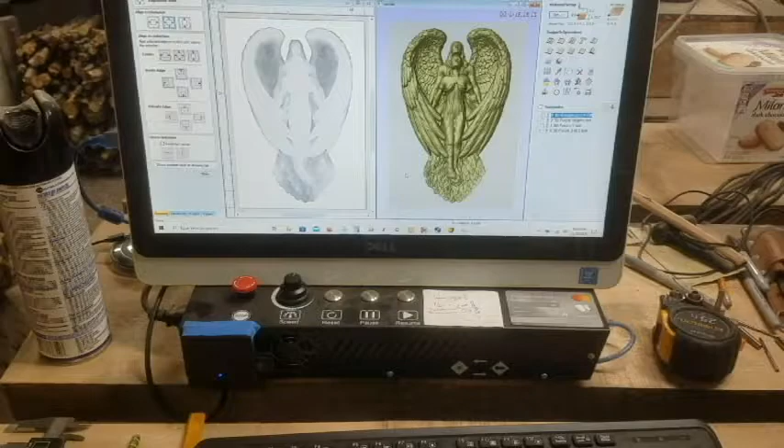Okay, so this is the project that we're going to be making. This is actually going to be a Christmas gift for Mrs. Devil.

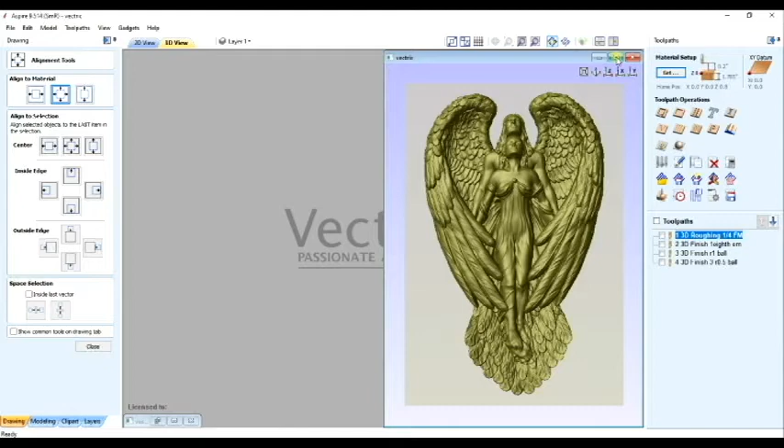Let's take a look. And that's me, the fallen angel, and that's Mrs. Devil.

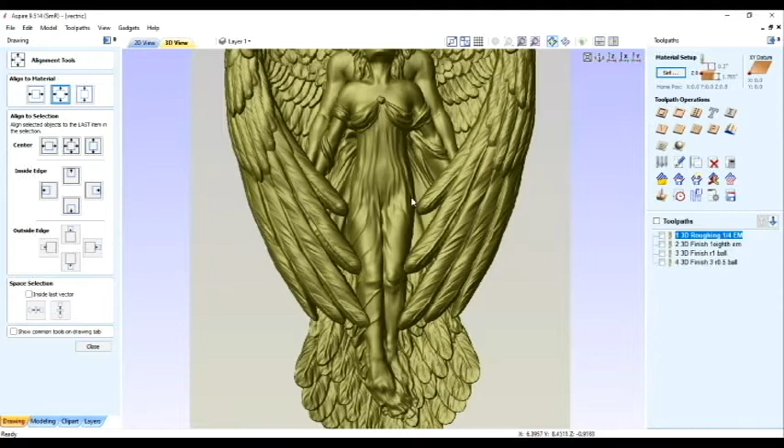I wanted to do it out of beech, but that didn't work out. So we're doing it out of just that walnut slab, which is drying. The glue's drying as I speak. So that's what we're working on.

Oops, wrong button. Here's the file. I found the file on the internet.

The size of the drawing right now is set at 11 inches wide and 16 inches high, with a depth of 1.785, which is what the 2 walnut boards glued up should come out to be. We'll measure that when the glue dries.

So that being said, if you look down here, you'll see coordinates, and you'll see the Z coordinate on the right down here. It's inches, 17 to the top, 550 thousandths to the top here, 0.17 from the top. I think her chin is probably the highest.

Nope. The nose, maybe? Well, I guess her chin is. These are up there too. 0.1, 0.2. So here's your highest point.

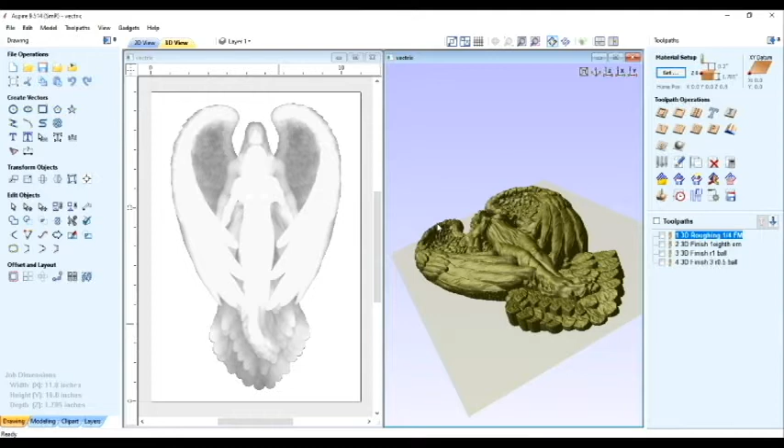And then we got the wings. Actually, yeah, the wings are slightly below. Yep, look at those mountains. We got a high point here. What's this too? Is this the wing?

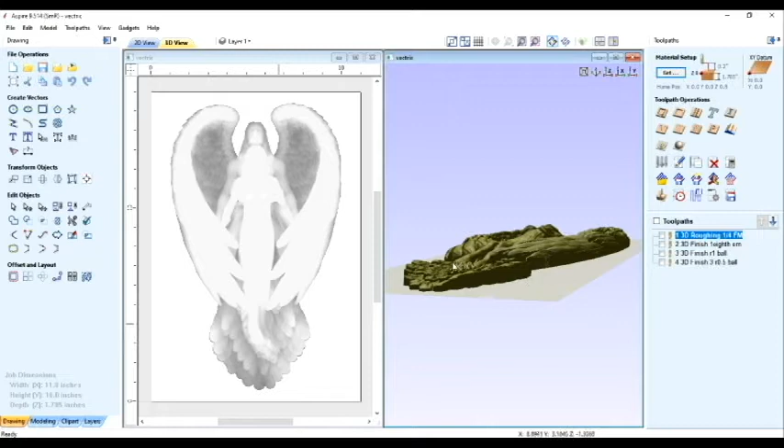Half an inch. At the bottom is 1.3. And if you remember, we went with 1.7. So we'll have a little bit of a background left over when we're done cutting.

The tool paths, standard stuff, roughing paths, material boundary. So that's going to take out all this over here. If we went with model boundary, it would go around the edge like this. So we're going to material boundary.

I've already saved it. And then we're going to go with the 1/8 inch finish material boundary again. We're going to smooth this out as well as the carving.

Then after that, we're going to go with a 1mm ball, smooth it out some more out here as well as the image itself. And then we're going to finish with the 1/2 millimeter radius ball.

This one we're going to do just the model boundary for time. So it's going to just go around. It's just going to do this part right here. It's not going to do out here.

After that, we can look at the times it's going to take. Looks like we're 5 hours in, which is going to turn into 10 on this machine, most likely. And then we're going to output our G code one at a time.

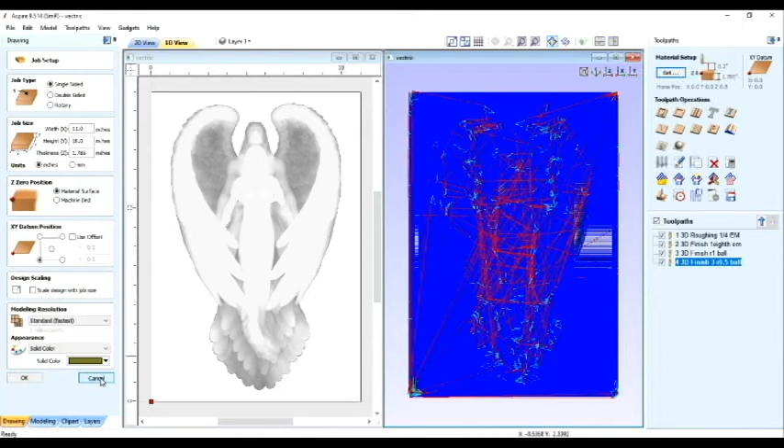After that, we're going to use Candle to output the G code to the machine, and I'll take a screenshot when I get to that point. But right now, the screen recorder is locked to the screen, to this program.

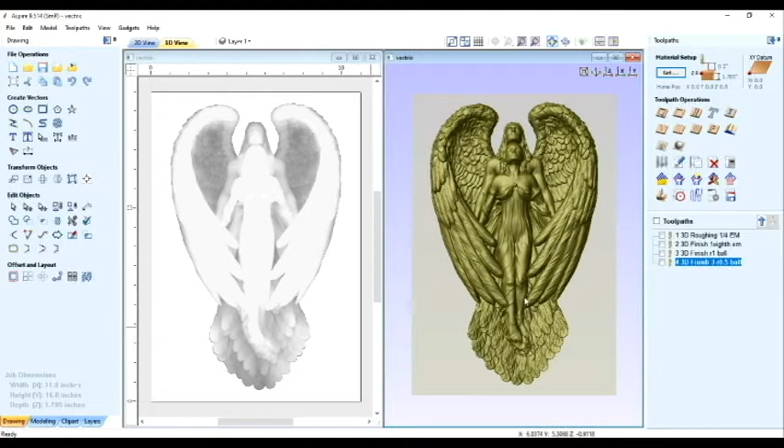So, that being said, I hope it comes out good, and I hope she likes it. A symbol of our love. I'll get all sappy while I'm clicking on there.

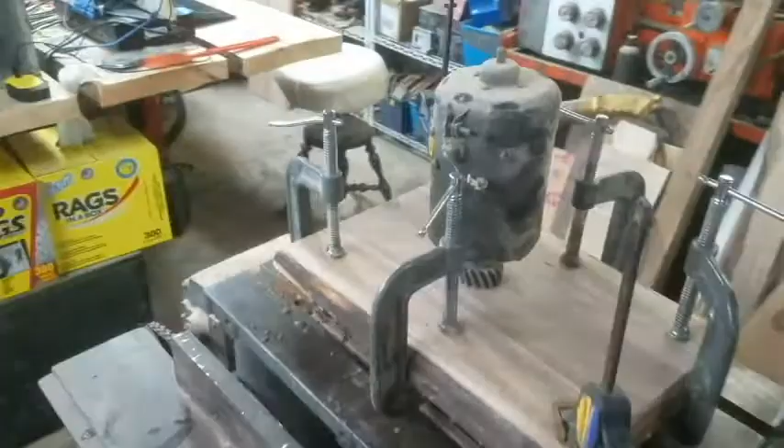Welcome back. It is now 24 hours later. Yes, that is a Model T generator, but it is really heavy.

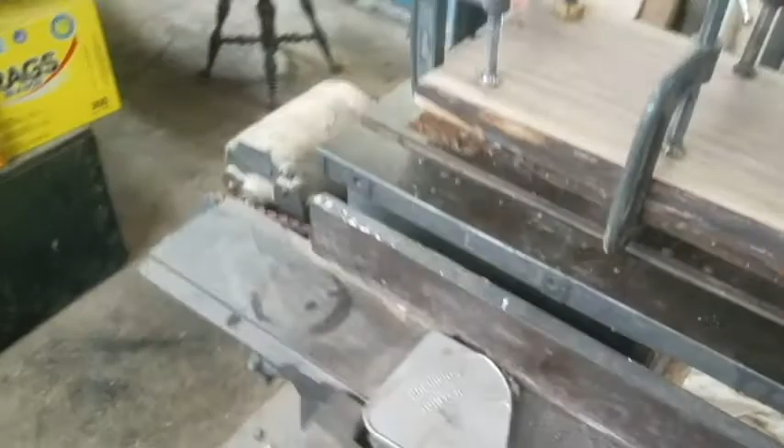And I wanted to get the weight in the middle of the board, because we're going to carve it and I don't want it to come apart. I don't want the image to lift. So I'll get these out of the clamps, and I guess the next step is to put it in the mill and start cutting.

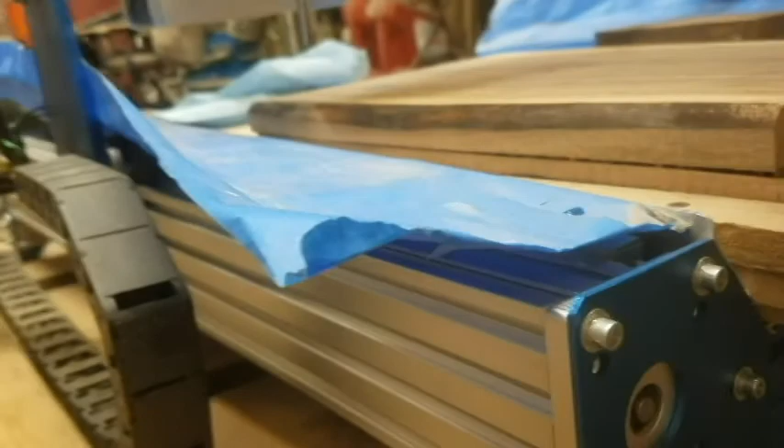Okay, we're back on the Angel project. Got my boards glued up, but ran into a little bit of an issue here. Even with the weight on it, I have no idea what happened. Looks like it's connected in here just a little bit, but the edge is curved out. The other side was alright. We're homing the machine. I've got...